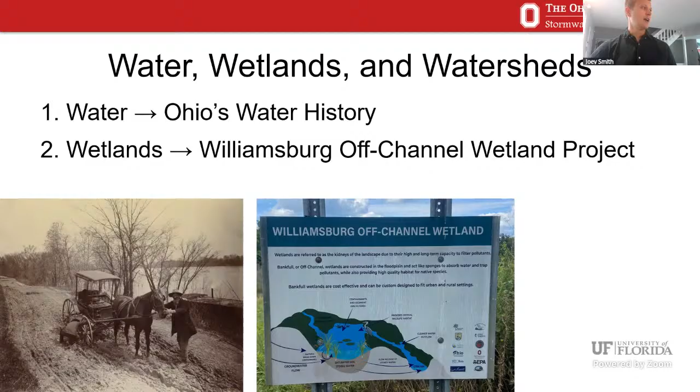All right, so for water, I'm going to start by talking about Ohio's water history. Then for wetlands, I'm going to talk about the Williamsburg Off-Channel Wetland Project. That's down in Cincinnati. And then for watersheds, I'm going to talk about the Blueprint Columbus Project, which is in central Ohio in Columbus.

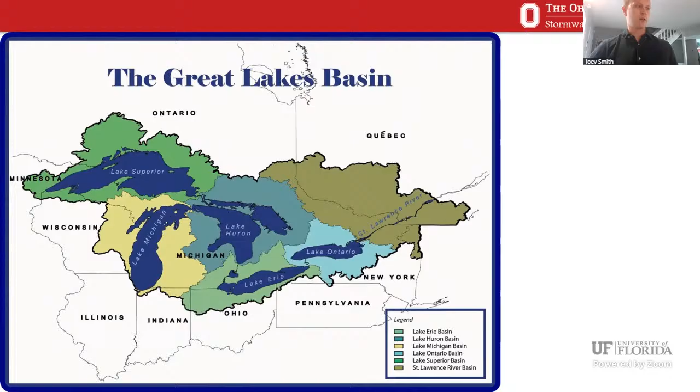So for Ohio's water history, Ohio is located just south of the Great Lakes. We have Lake Erie to our north and the Ohio River to our south. So here's Ohio. And water to the north of our state drains to Lake Erie. Water to the south of our state drains to the Ohio River, then into the Mississippi, and then into the Gulf down by you guys.

So in 1803, when Ohio first became a state, Northwest Ohio was basically untouched and only known to Native Americans and some explorers. But development in this Great Black Swamp area was delayed nearly 100 years behind the rest of the state. And that's because of that Great Black Swamp. Some historians called it an absolutely terrifying wilderness, one that swallowed wagons and horses.

So if you think about some of the words that are in the English language that are related to wetlands, when we say I'm swamped or I'm feeling bogged down, swamps and bogs are both other names for wetlands. And it's kind of ingrained in our English language that wetlands have a negative connotation. And it's sort of because of that westward expansion dialogue.

So in 1835, there was a Toledo War where Ohio and Michigan had a dispute over who was going to own this Toledo area. And it was a bloodless war. So no blood was shed, but the result was Ohio got Toledo and Michigan got the Upper Peninsula. So if you ask me, the Upper Peninsula is a pretty nice win.

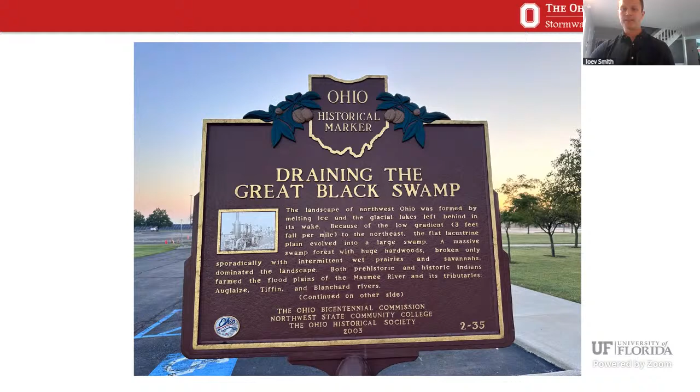So here's a historical marker talking about the draining of the Great Black Swamp. And it has become one of the most productive regions in Ohio in terms of agricultural production because it once was a swamp, a wetland. So some consequences of draining the Great Black Swamp.

So Toledo, that same area that I mentioned in the dispute, it's got some consequences from draining the Great Black Swamp. And I want to kind of tie this into Florida a little bit with the red tide. My understanding is that it's caused by lots of nutrients going into the ocean. The same story is happening here in Ohio. We have lots of nutrients going into Lake Erie. It's a very shallow area, so it's prime recipe for algal blooms.

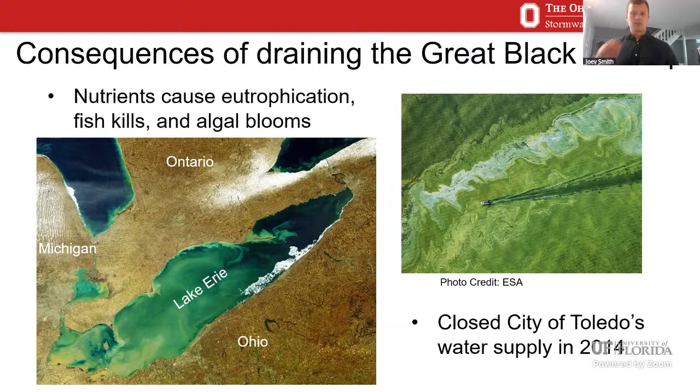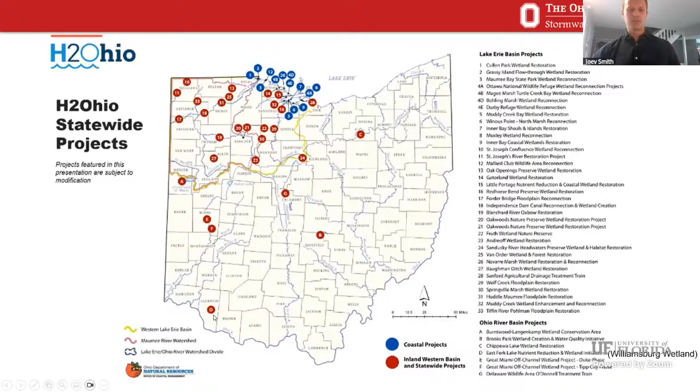You'll notice that most of the projects are concentrated up in the Great Black Swamp former area, but the project that Ohio State is really monitoring is this D down here, the Williamsburg Wetland project. So that's what we're going to start talking about today.

So the Williamsburg Wetland is an off-channel wetland, and this work is Sarah Walentine's master's thesis. So I wanted to give credit to her. She did a lot of great work, and she just got her dream job where she'll be designing these sorts of wetlands.

So a little bit of background on this wetland project. It's located in Southwest Ohio in Clermont County, just east of Cincinnati. It's in the floodplain of the East Fork of the Little Miami River. The drainage area upstream is 234 square miles, and it's 64% agricultural land use. So this is an ag project.

Among other important uses, the East Fork of the Little Miami River provides public water supply. There's also lots of recreation that happens in the area, so there's lots of contact with people in the water. It has a very gradual slope in the area. And prior to the wetland construction, the land cover was primarily a forested riparian zone.

From the 1950s to 2018, the river was dammed just downstream of the wetland location to create a reservoir to provide drinking water for the village of Williamsburg. The dam removal occurred in November 2018, and then the wetland was constructed in 2022. We began monitoring it in April of 2023.

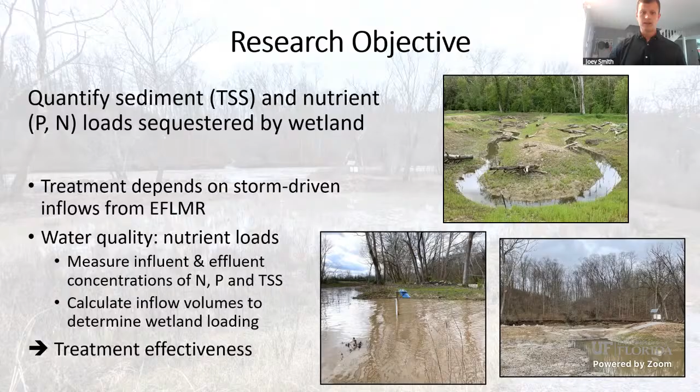There's a 24-inch pipe with a flap gate that diverts water into this reservoir, and then water is very slowly let out of the reservoir through the gut of the wetland. And it's designed for a large storm event over 10 days to very slowly allow the water to go out of the reservoir.

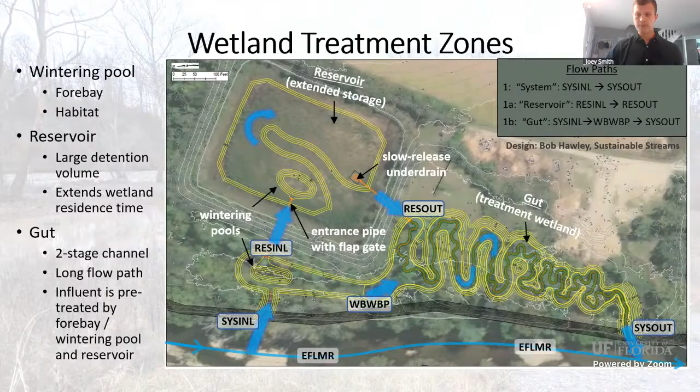And then also throughout here, we have some water level U20 loggers to see the water level, and those are at 7 different locations throughout. The gut is a 2-stage ditch and is very sinuous. There were logs that were taken from the excavation site and put into this 2-stage ditch to allow the water to slow down. We also have an on-site rain gauge to track the precipitation at the site.

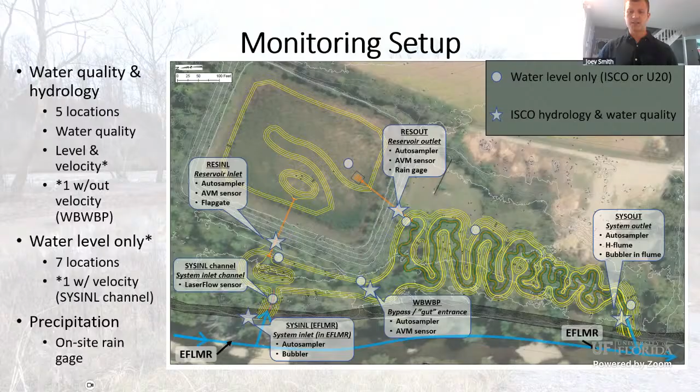Due to the very low site gradient and backwater flowing into the system, the influent and effluent samples are collected according to sampling location, and the effluent samples are composite. We were able to calculate load using a stage storage model. Since we didn't really have water entering from a pipe and it was more of an open channel, it was a little complicated to use auto samplers to quantify. So we ended up using a stage storage model and the water level loggers throughout the system.

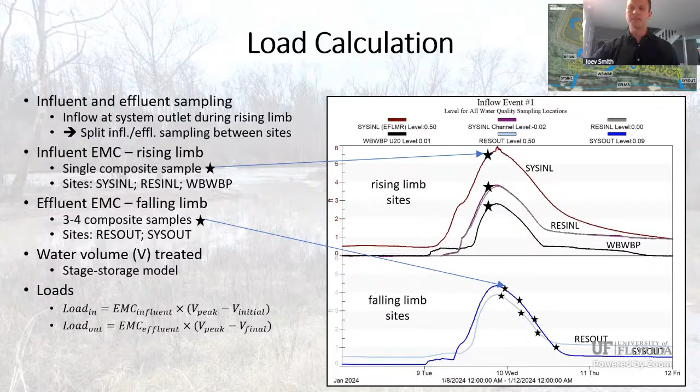Although calendar year 2023 was our first monitoring year, the water quality sampling equipment was not set up in time to capture the wet season. So we've only gotten samples from January through May. The rest of the year has been too dry and the river stage hasn't gotten high enough to create a sampling event. But in calendar year 2024, there were 66 on-site rain events, 8 of which were associated with wetland inflow. Those 8 numbered events are the ones that allowed inflow into the wetland. This wetland was designed to get more like 30 inflow events. But since 2023 was so dry, we didn't see any inflow events in 2023.

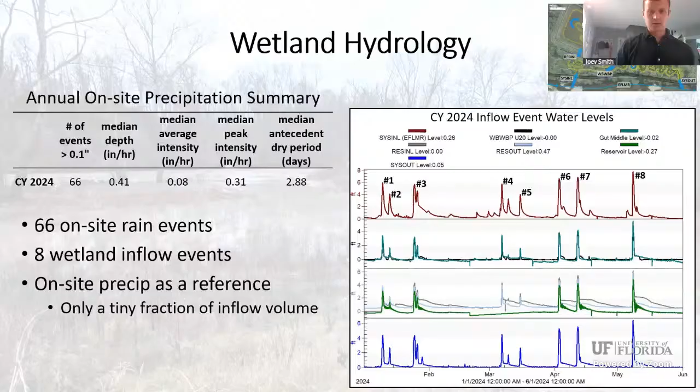I've gotten to be down at the wetland to see the Parks Department excavating out the inlet because of all that sedimentation. It's a really big job. They're currently submitting for grant funding to redo this inlet so they don't have to excavate so much sediment.

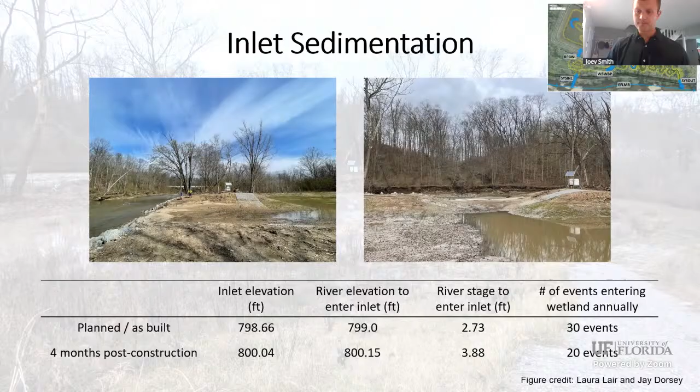And then let's look at the sediment. So significant reductions for concentrations occurred at all locations. And a lot of the sedimentation happened in that wintering pool, which we could definitely see by all the sediment that accumulated there, preventing water from inflowing. The bypass loads were calculated using the gut volume, so no significant load differences were observed between the bypass and the outlet.

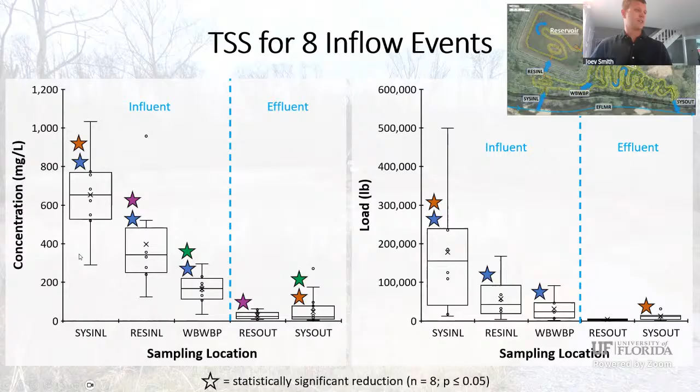So on the left of this blue line, you can see the influent TSS concentrations are higher than the outlet, the effluent, in terms of concentration and in terms of load. We're seeing very large load reductions. And same story for total phosphorus. For the influent, you can see we have higher concentrations and loads in comparison to the effluent.

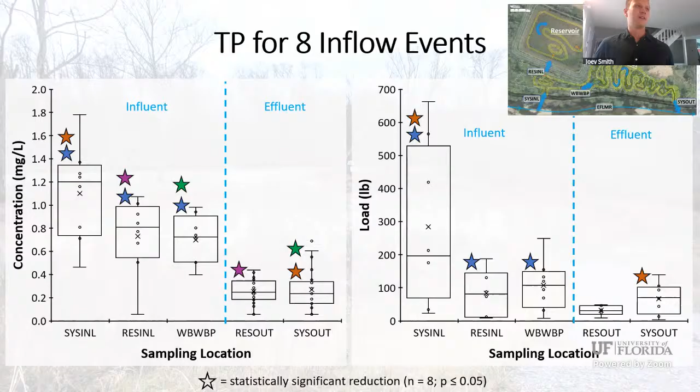So processes that made this happen: a lot of phosphorus is particulate bound, so we had sedimentation occurring in the wintering pool. And then for the dissolved form of phosphorus, which is really concerning for eutrophication, there was additional treatment occurring in the gut of the wetland. For total nitrogen, you could also see some significant reductions, but here the gut of the wetland had more of an influence.

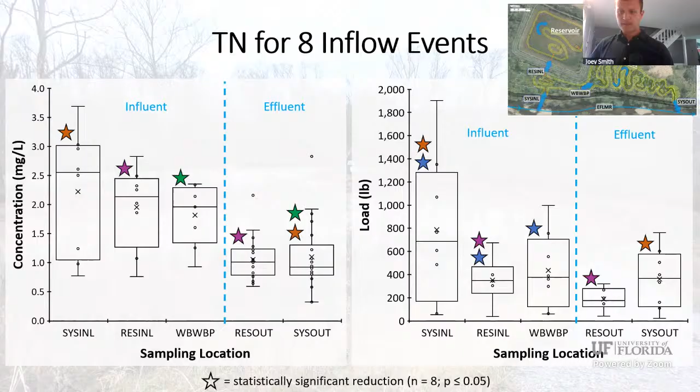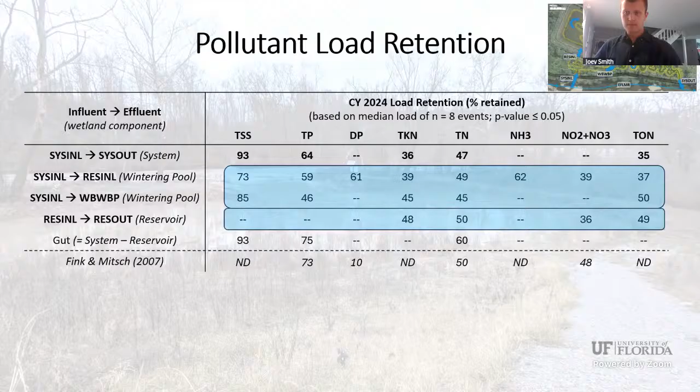And sorry, this presentation was made by a colleague, so I'm not as familiar with this part, but the second part I'm more familiar with. I just really wanted to highlight the huge load reductions that we're seeing from the system and the different parts where that retention is happening.

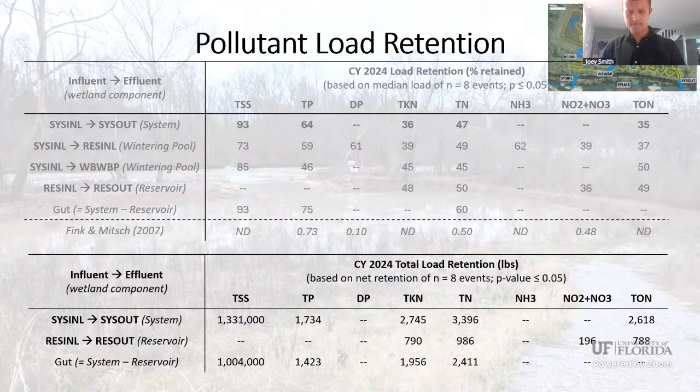All right, so conclusions for this first part. There were highly effective sediment, phosphorus, and nitrogen load reductions. The wintering pool was great for particulates, dissolved phosphorus, and nitrification. The reservoir enhances nitrogen treatment, and the storage volume and long residence times are key for the denitrification processes.

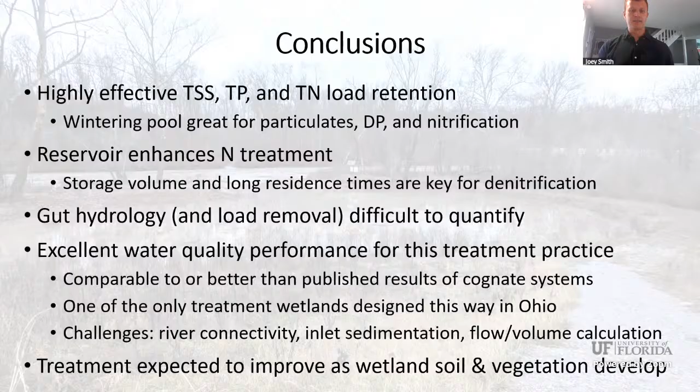The gut hydrology and load removal are very difficult to quantify, given that it's this 2-stage ditch open to the elements, with water going in and out both ends. We saw excellent water quality performance, and the treatment is expected to improve. We're continuing to monitor this wetland in calendar year 2025. Every quarter, we are collecting soil and plant samples to try to do kind of a mass balance of nutrients within the wetland. And Sarah did create a model of this wetland.

So in order to create the model, an aerial survey was done. We had a drone fly over the system and used that to create a DEM. Design drawings were used to help create the model, so we knew the different dimensions of the pipes. And for the Manning's coefficient and the land cover, we used the National Land Cover Database.

So for hydrology, there was a USGS gauge for the river stage just upstream of our practice. And then we also had hydrology data from our 5 ISCOs throughout the system. And then we had 2D unsteady flow modeled through HEC-RAS, and we were able to model the 8 wetland inflow events that occurred in calendar year 2024. And Sarah did some qualitative and quantitative model fit. I don't have time to get into that today, but the model did perform very well.

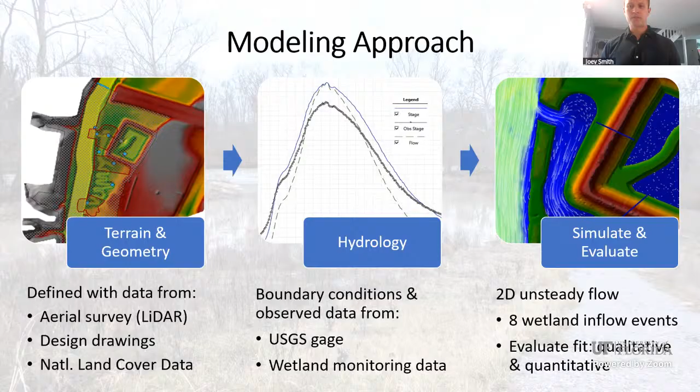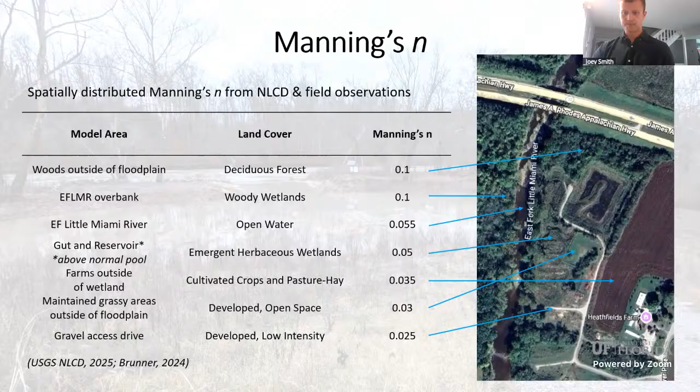So Manning's n is a key parameter in this model. These are the Manning's n values determined through literature and field observations. And you can see we have different Manning's n values for the different portions of the watershed. And we conducted unsteady flow analysis. There were 8 storm events modeled with unsteady flow using 2D flow in HEC-RAS.

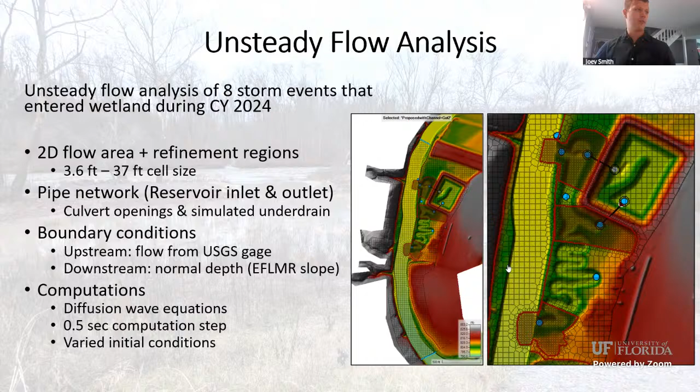And I wanted to show how the model looks. Oops. I'll start with water level. So this was for the 6th event that occurred in 2024. It was a 1.4-inch rain event. And you can see water entering the reservoir, and then it just went through the sinuous part of the gut. And now it's entering into the stream at the system outlet.

In this model, the peak river flow was 6,780 cubic feet per second. And the peak depth of the gut got to be 4.8 feet here. So there's the water level model. And then I'm going to play the velocity model.

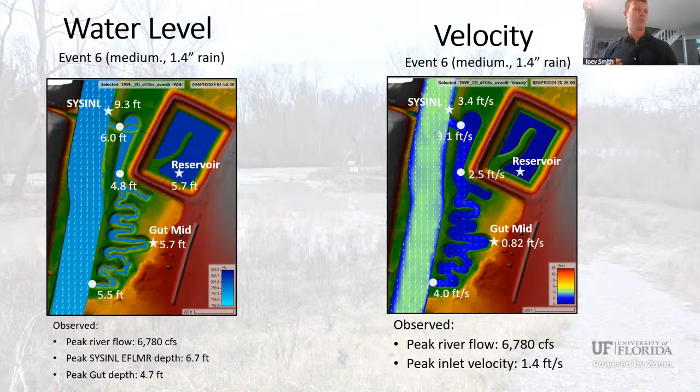And this was a medium level event. We did have some smaller events that caused inflow into the wetland, but I thought this was a good way to show how you can use this field data to create models. And then now that we have this calibrated model, we're able to do different scenarios and understand how sediment is transported through the system. We have another PhD student who just started on this project, and our goal is to look at sediment transport throughout the system. So it's really great to have this calibrated hydrology model.

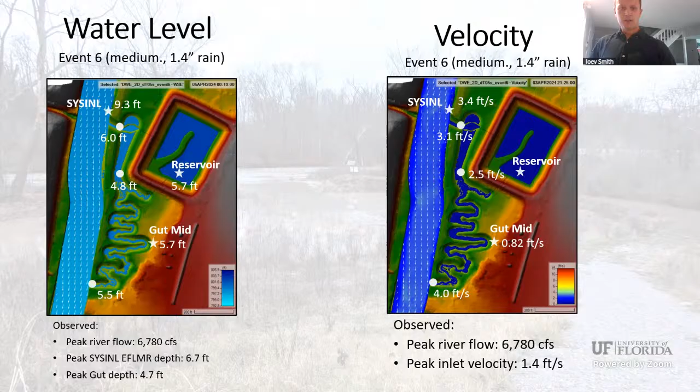So some conclusions from the modeling part of the Williamsburg Wetland project. HEC-RAS 2D is a useful tool in this type of floodplain. The simulation is successful for all events. There were very good Nash-Sutcliffe coefficients for 6 of the 8 storm events with very low bias. So the 2 storm events that were more difficult to model were back-to-back events just because of the initial condition assumptions. So that's another area for improvement in this project.

And here are some of the sources of model variability, especially with initial condition, as I just mentioned. But we could also improve Manning's N at a higher resolution. So that's the first project of the Williamsburg Wetland. You can see that in response to draining wetlands back in the 1800s, Ohio was really investing a lot of time and resources into putting these wetlands back throughout the state, especially in Northwest Ohio.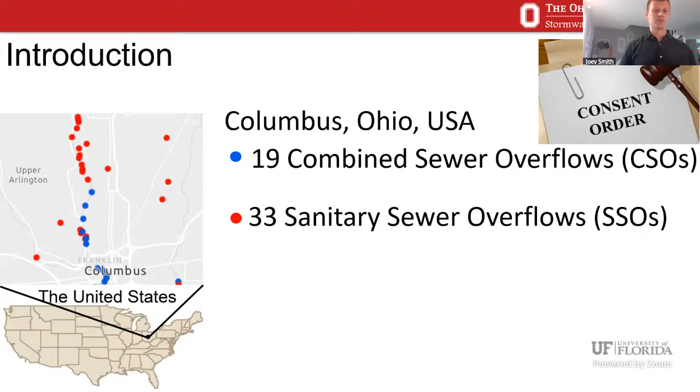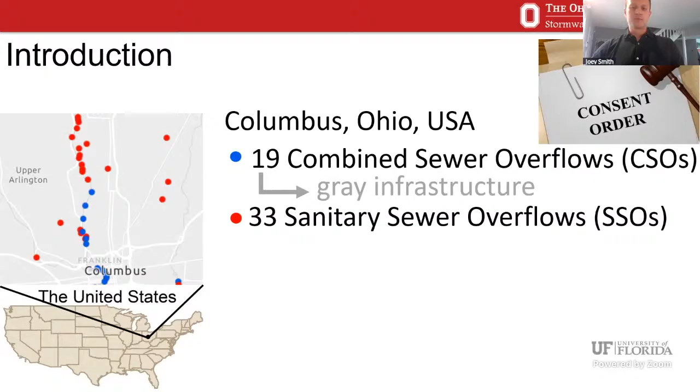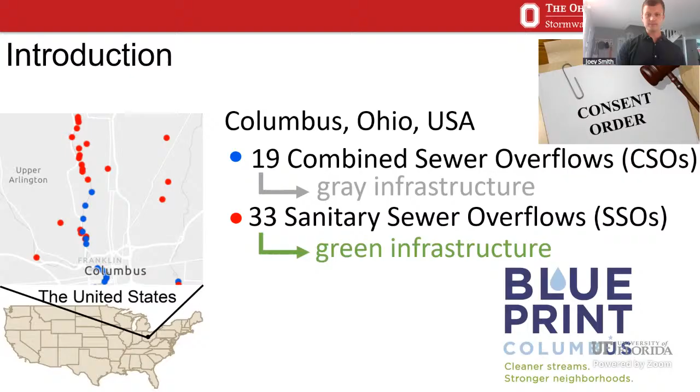So in order to respond to the consent order, which is a lawsuit, the Ohio EPA sued the city of Columbus. So in order to respond to this lawsuit, we decided on gray infrastructure to respond to the combined sewer overflow consent order. And we decided on green infrastructure to respond to the sanitary sewer overflows. So the response to the SSO consent decree, the project is called Blueprint Columbus. So Blueprint Columbus is a massive project that started around 2015 and it's set to go through 2045.

This map shows different areas throughout the city, and they're all expected to get green infrastructure from now through 2045. This is the area that we conducted our study in. It's called Clintonville. It's a neighborhood in Columbus, and we have the Olentangy running along its west side. And you can see on the map, they have an interactive map so people can see the different phases of the project and its progress. But these different shadings are rain gardens, different styles of them, and pervious pavers throughout the different watersheds.

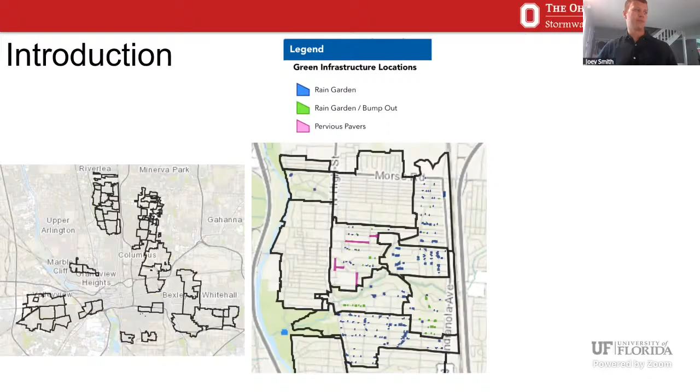They did also install a big wetland down here in the Park of Roses. So in this watershed down here at the bottom, we have hundreds of bioretention cells that first treat the water, and then additional treatment is provided by a wetland downstream in the park. And here are some of those pictures. So the blue shading is sort of like the top picture. It's a big regional basin where water is piped in from the sewer system.

And then the green are called bump outs. So they sort of go onto the road. They collect water that runs along down the curb. And then there are pervious pavers. Entire streets are being turned from impervious asphalt surfaces to pervious pavers.

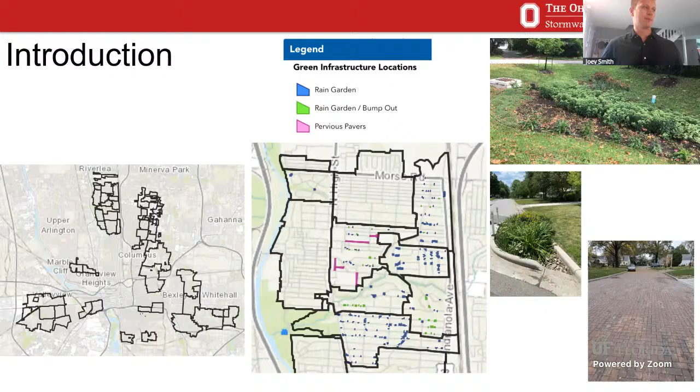So Blueprint's a little bit complicated. There's 2 different phases, and I'm just going to be really focusing on this post-GI phase 1. So the first phase is green infrastructure was installed into neighborhoods. And then the second phase, these additional infrastructure improvements, which we call AI squared, additional improvements, were conducted. So downspouts from homes were redirected into the rain gardens.

Sewer laterals were lined, and the goal here was to prevent infiltration and inflow into the sanitary sewer. And then homeowners who did not have a sump pump were given a free sump pump. And so in phase 1, the main goal was to reduce total suspended solid loads by 20%. The city had that written as a goal of their green infrastructure.

And then for the second phase, the goal was to prevent infiltration and inflow into the sanitary sewer. A lot of the pipes that go out of homes in these areas are clay pipes. It was a more legacy area with older homes. So people were experiencing basement backups as tree roots and other obstructions caused sanitary sewage to back up into people's basements. So 2 main goals of this Blueprint project: reduce total suspended solids concentrations by 20% and to reduce infiltration and inflow into the sanitary sewer.

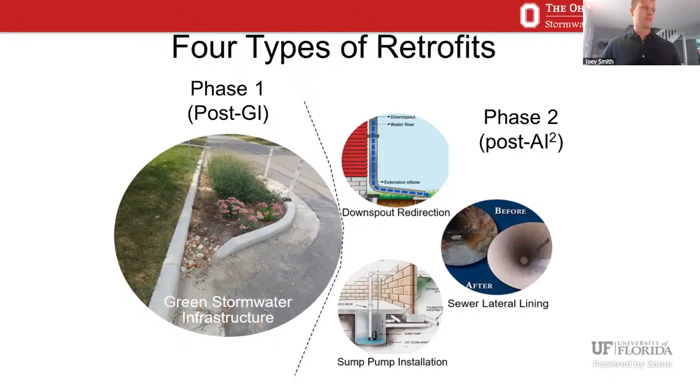The broad goals of Blueprint align with the OSU research objectives. So Blueprint wanted to control stormwater flows, so this is more hydrology focused, improve water quality, provide habitat, improve property values, and stabilize neighborhoods. There was also the want to create more jobs in neighborhoods by having people maintain the bioretention cells and to maintain the permeable pavement.

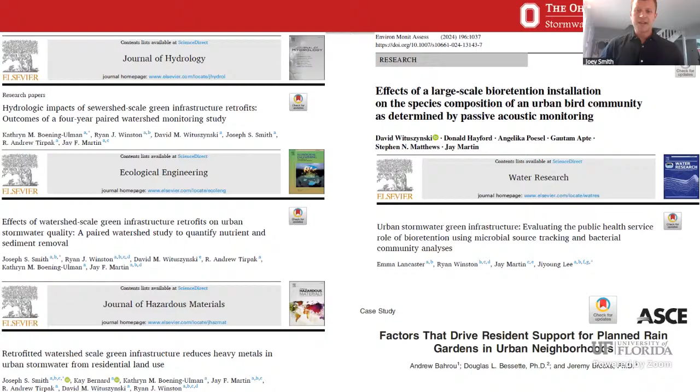And we've gotten a lot of papers out of this. The first 3 papers on the left side are about hydrology and water quality. Then on the right side, we have papers about habitat, public health, and social perceptions. But for today's presentation, I'm really going to focus in on these 3 papers up here, which are looking at hydrology and water quality.

So the research objectives of the study were to quantify the hydrology and water quality changes that occurred from green infrastructure and to discuss some of the reasons. And this work was done to address some existing knowledge gaps. So this is a very massive project on the scale of larger than 10 hectares. There have been some other studies looking at watershed scale installations of green infrastructure, but they are at very small scales with maybe just a couple of practices installed, but we're talking about an entire neighborhood.

So the main two kinds of green infrastructure installed into neighborhoods were bioretention and permeable pavement. And I wanted to introduce you to the bioretention design in these neighborhoods. So the bioretention and green infrastructure broadly in this area were designed to treat the water quality volume, which at the time was 0.75 of an inch. But as we get more extreme rain events, Ohio has since updated its design water quality volume to 0.9 of an inch. Anything beyond that water quality volume is designed to just go into an emergency overflow or just bypass the system entirely.

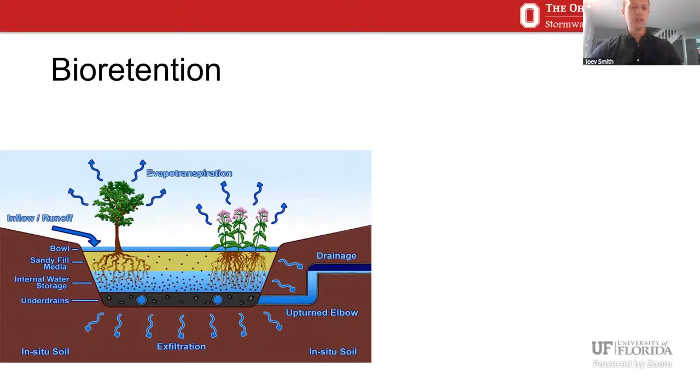So in Columbus, we had to have an underdrain for our bioretention systems because we have clay soils here. And if you don't have an underdrain, then it would just turn into a wetland. It wouldn't drain very well. And then the city decided to not have an internal water storage zone. So for the green infrastructure side of the project, they only wanted to reduce total suspended solid loads. If you add this upturned elbow, it would have created more hydrology benefits, but for this side, they were only really interested in TSS reductions. So one of our suggestions after this study is if they wanted to see more hydrology benefits, perhaps they could consider this upturned elbow, but that was not the case here for Blueprint.

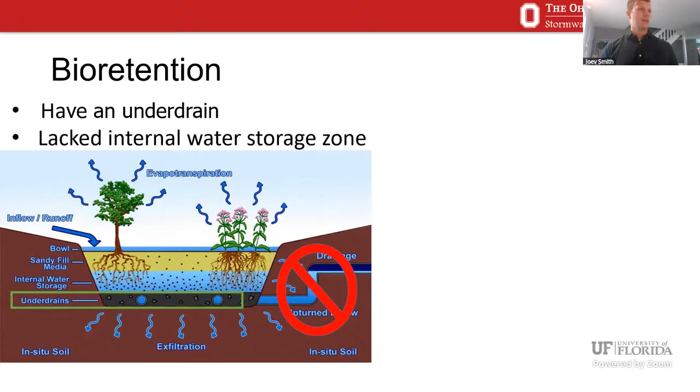Then for permeable pavement, the city decided to go with permeable interlocking concrete pavers. So you have bricks and the stormwater runoff enters through the interstitial spaces. There is an underdrain that still conveys to the storm sewer and then downstream waterways. But here there was some opportunity for exfiltration again into the substrate. But you can see here with permeable pavement, there's no bio in terms of plants, but there are some microbes still in that very rocky substrate.

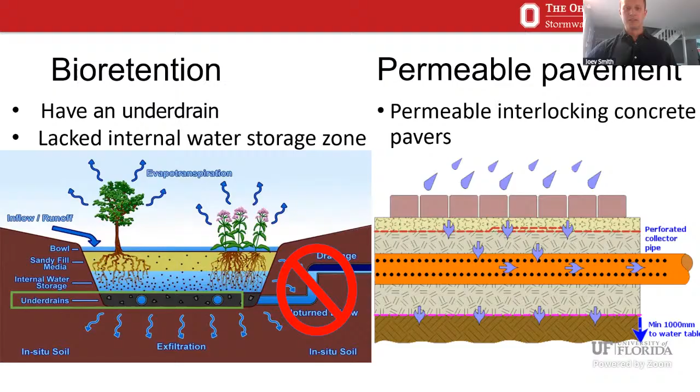So in order to do this study, we had to use the power of a paired watershed design. We wanted to say that the changes we were seeing in hydrology and water quality were due to the green infrastructure and not due to seasonal or annual changes in the watershed. So we had to have two watersheds, a control and a treatment. And then we had two monitoring periods, the calibration before any green infrastructure was installed, and then the treatment, which is after any green infrastructure was installed. And like I was saying, this accounts for the year-to-year and seasonal climate changes.

So here is our area that we're working with. We had the Olentangy River to the west. The yellow shows the three watersheds that were in our study. The purple are the outfalls that we monitored at. The different green areas are bioretention areas. And then orange is permeable pavement. You can see that these were all very close in proximity to each other, within 1 kilometer of each other.

So our control area is called Beechwold, and it had no green infrastructure. You can see that there's one street that ended up having green infrastructure installed, but that was not part of the plans and we had to adapt. But we were able to decide that it was such a small area of the watershed being treated that we thought this was marginal. We did have 2 other control watersheds on the other side of the river and decided that Beechwold was still an effective control despite that one road getting some green infrastructure installed.

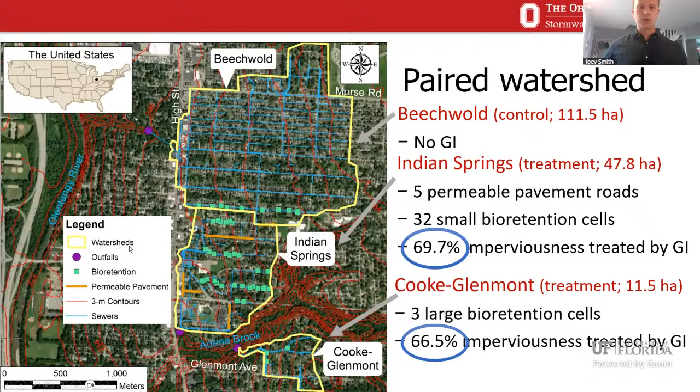So for our monitoring, we had continuous rainfall and flow monitoring, and we monitored at 4 different outfalls. You can see those outfalls here. So these are the same outfalls that are in purple in this map. And we equipped those outfalls with area velocity meters. We also had the sample intake inside those, and they were programmed to be enabled whenever the level above the sensor went up by 0.2 feet. That was simulating a rainfall event. It was just an indicator that it's raining in the watershed, the water level got higher above that. And we analyzed for different nutrients, sediment, etc.

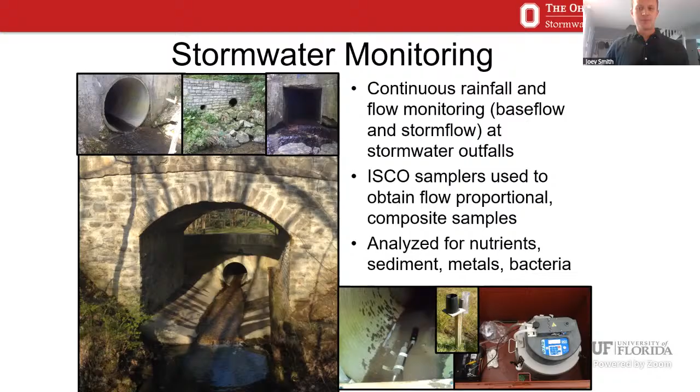So here are some results about hydrology. So in this watershed, we saw around about 20% runoff reduction provided by the bioretention and permeable pavement. That was in phase 1 of the project. So compared to the pre-green infrastructure phase, the post-green infrastructure phase had 20% less runoff produced. But then after the next phase, where additional stormwater infrastructure improvements were added, for example, the downspout redirection, the sump pumps, and the lateral lining, there ended up being no change from the pre-green infrastructure.

So to kind of sum up the hydrology story, there was a baseline water depth. Then green infrastructure was installed, and the runoff depth reduced by 20%. Then we added more water to the system with these additional infrastructure improvements. So we went back to the pre-green infrastructure phase. So there was no net change in runoff depth.

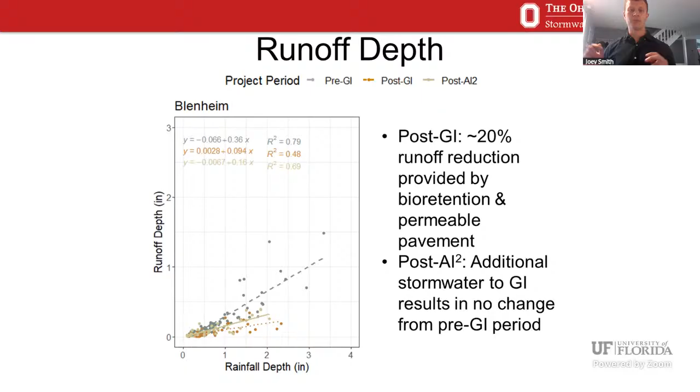So the percent of the watershed imperviousness treated by green infrastructure was about equal to the percent TSS concentration reductions that we saw, within a 5% margin. So if you are a planner trying to get rid of a certain TSS concentration, you might consider how much of the impervious area you're treating by green infrastructure. From what we found, it's closely related to the impervious level that you're treating. And the city's goal was to reduce TSS loads by 20%, and they far exceeded that just from the first phase.

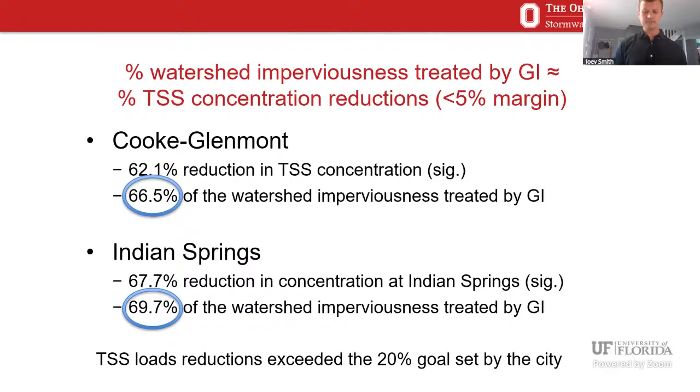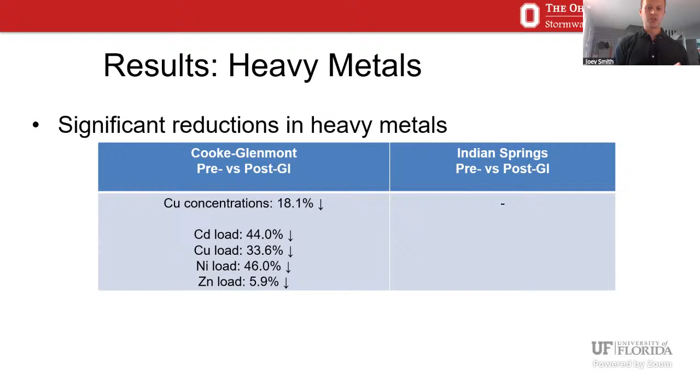For heavy metals, there were significant reductions at only one of the treatment watersheds, at Cooke-Glenmont. So we saw copper concentration reductions, and then we saw load reductions for 4 of the metals. And I've been thinking long and hard about why we saw heavy metal reductions in one treatment watershed but not in another. And I think I've found out why.

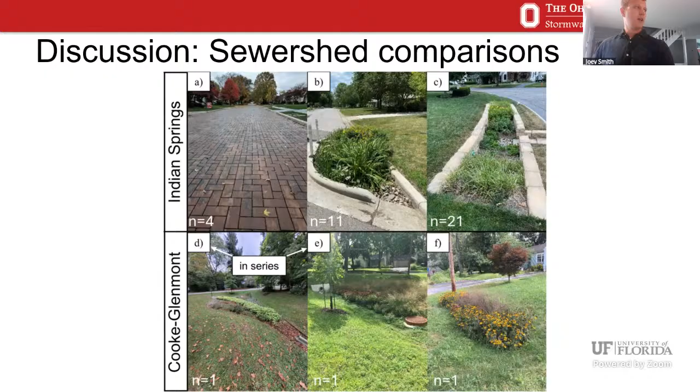So I want to talk a little bit more about copper. Copper is the only heavy metal analyte that we saw having a significant reduction in concentrations. Copper complexes with organic matter, and we did amend the bioretention soil media with organic matter. So copper that comes from brakes and roofing materials was able to complex with the organic matter inside of those Cooke-Glenmont bioretention cells. And that's why we saw reductions.

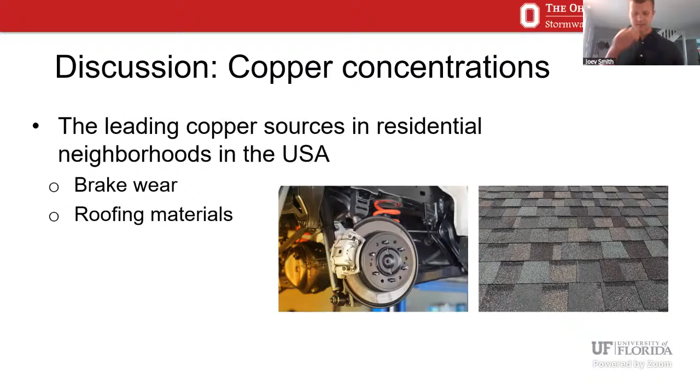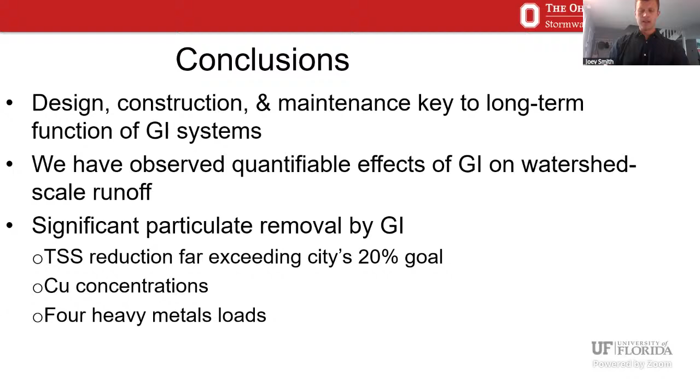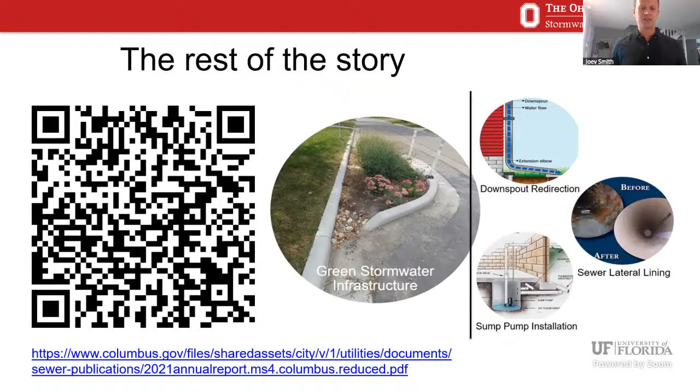So some overall conclusions from the presentation as a whole. Ohio's wetlands were drained back in the 1800s. That created some water problems like eutrophication. But now Ohio's investing a lot of time and effort into watershed restoration at big scales. We're reconnecting rivers to their former floodplains, and we're installing green infrastructure into neighborhoods in response to outdated systems. So thanks for listening to my story about wetlands and watershed scale installations of green infrastructure.